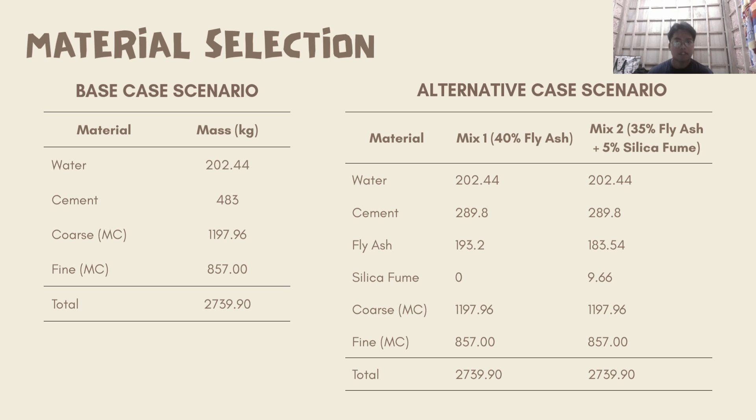The concrete mixtures for the base case scenario and alternative case scenario are based on ACI 211 mix design method. The goal strength of these mixtures is 43 megapascals. For the ACS, two mixtures are tested first, one with cementitious materials of 40% fly ash, and one with 38% fly ash and 2% silica fume.

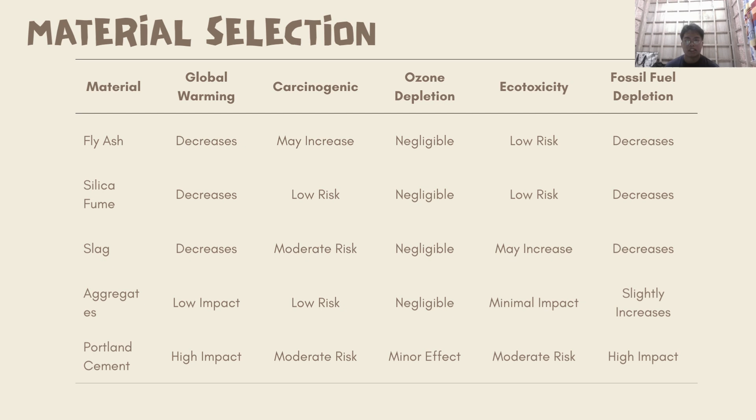The supplementary cementitious materials are selected based on their effect on the environment and on the properties of concrete. The three SCMs reduce the greenhouse gases emitted and fossil fuel consumed when applied to concrete. The aggregates generally cause low risk on the environmental factors. The Portland cement, however, has high impact on global warming and fossil fuel depletion, moderate risk on carcinogenic and ecotoxicity, and minor effect on ozone depletion.

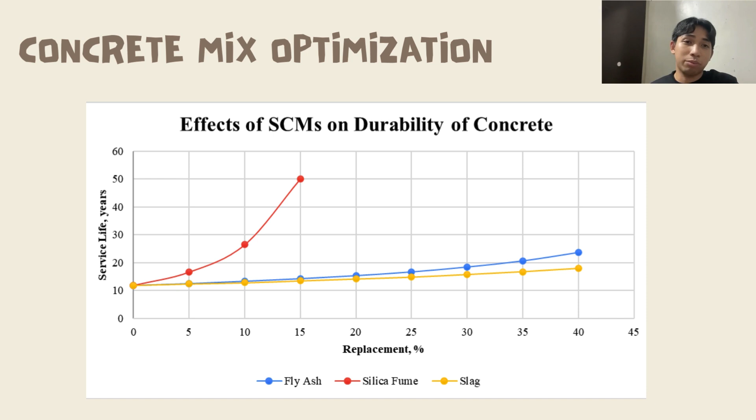The team wants to optimize a mix containing the SCMs shown while considering their effects on both durability and environmental impact. In terms of durability, it was found that silica fume produced the most durable concrete even at a low replacement percentage, followed by fly ash and then slag.

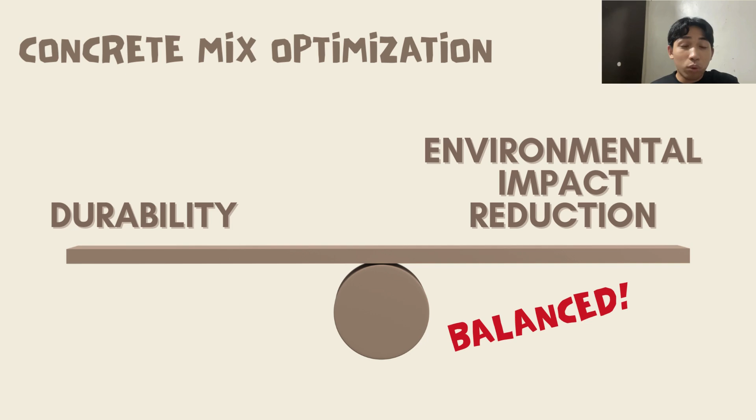In terms of environmental impact, fly ash produced the most eco-friendly concrete while silica fume yielded negative results. Again, we want a mix that balances both durability and environmental impact reduction. As a recap, fly ash was the most eco-friendly, while silica fume was the most harmful but produced the most durable concrete. Slag had the same trend as fly ash, but less in both parameters.

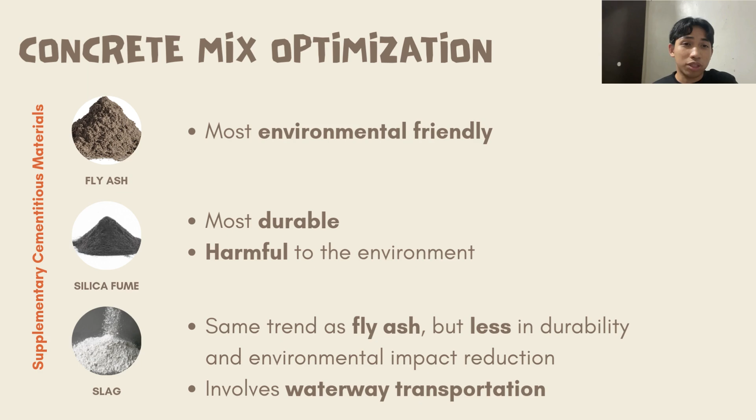Also, slag involves waterway transportation, which is impractical since our location mainly uses roads. Given those, the team chose fly ash and silica fume. The team decided to work around fly ash since it was the most friendly, but also added minimal silica fume to capitalize on its high durability.

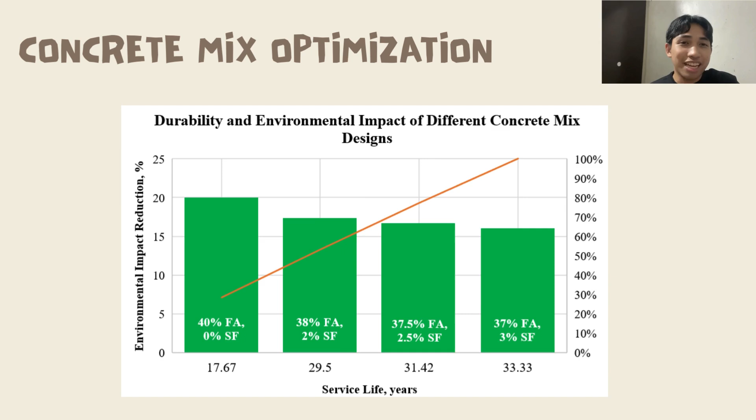The team identified 4 different mixes, and the plot shows the mix's durability and environmental impacts. All what's left is to determine which mix is the most balanced. We did that by normalizing the values, and upon doing so, we determined mix 2 with 38% fly ash and 2% silica fume as the most optimal design.

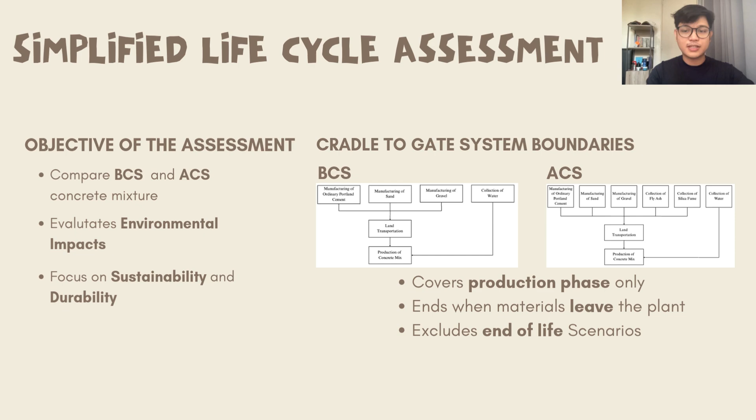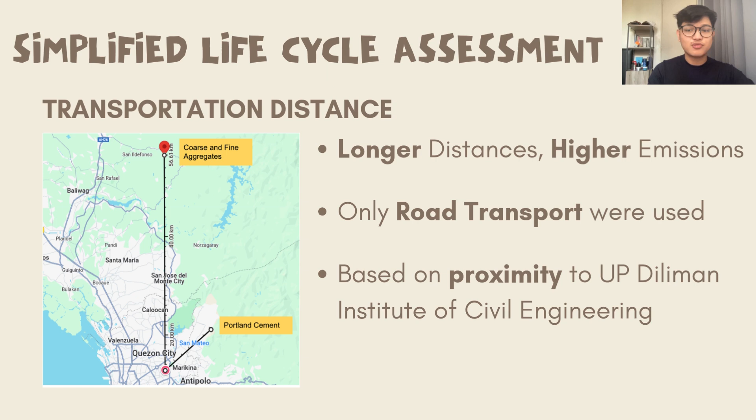While replacing cement with sustainable alternative, it increases transportation-related emissions. Transportation distances were a key factor, as longer distances contribute to higher emissions. To minimize this, raw materials were sourced from the closest facilities to the batching plant at the University of the Philippines, Diliman, using only road transport. This strategic sourcing helped reduce the environmental impact from transport, supporting the ACS overall sustainability.

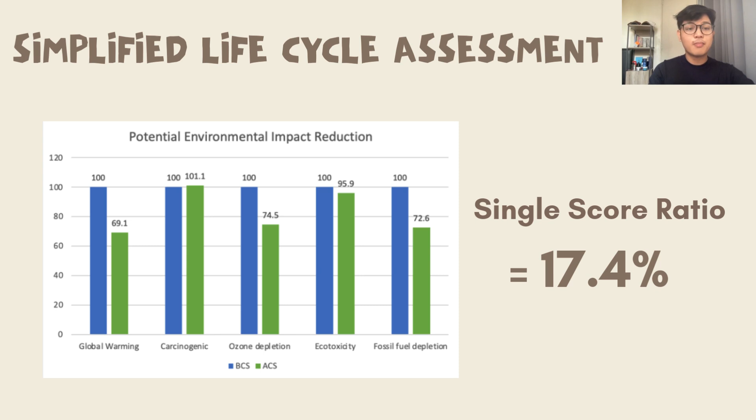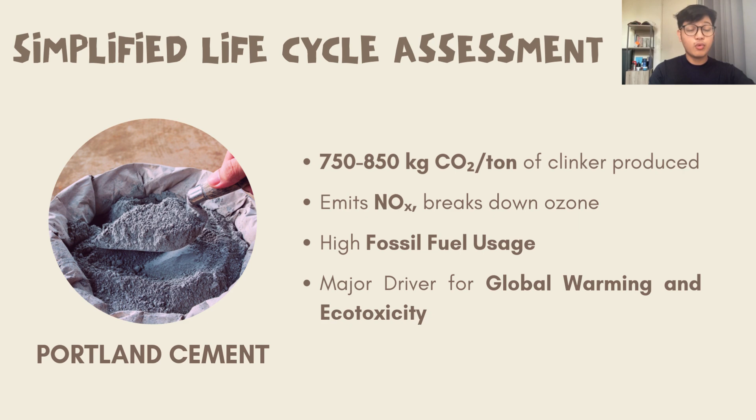In the Ecoconcrete calculator results, the ACS mix showed a single score ratio of 17.4% in environmental impact compared to the BCS. Portland cement was the largest contributor to environmental harm, releasing up to 850 kg of carbon dioxide per ton through calcination and high-temperature kilns. It also emits nitrogen oxides, which contribute to the ozone layer breakdown and requires significant fossil fuels. Aggregates added further strain through habitat destruction and erosion.

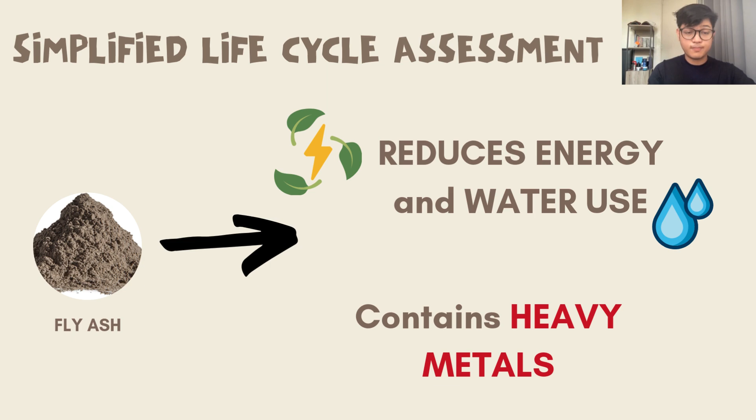While fly ash can increase carcinogenic risk due to heavy metals, it reduces energy and water use. On the other hand, silica fume lowers pollution and conserves resources. Together, they significantly improve sustainability while maintaining performance. Thus, the team chose a final mix of 38% fly ash and 2% silica fume.

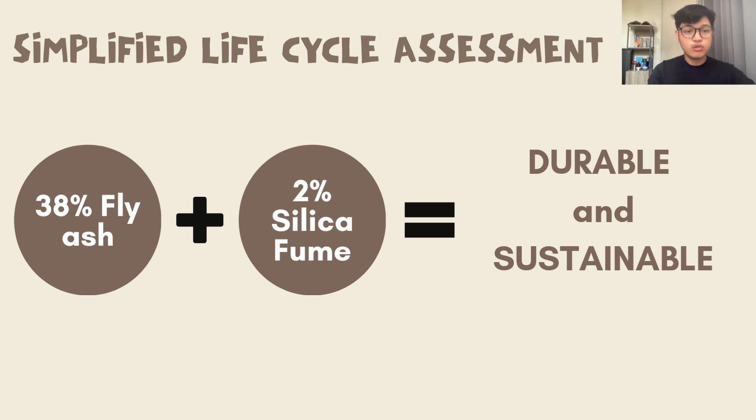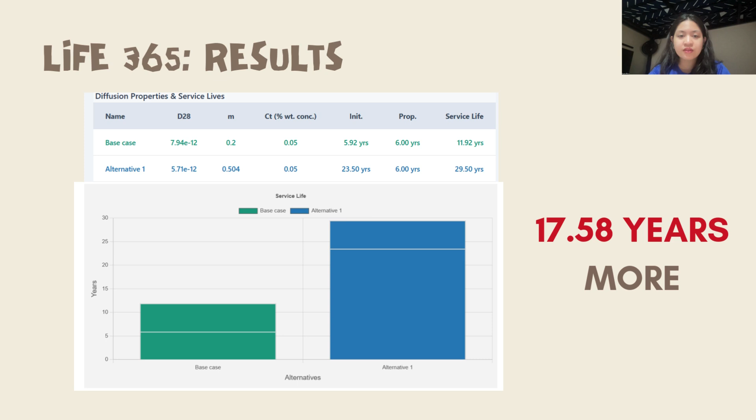This slide presents the total service life prediction for both the base and alternative mix designs using a Life 365 model. For the base case, it predicted service life up to 11.92 years. On the other hand, alternative case significantly extends the service life to 29.50 years.

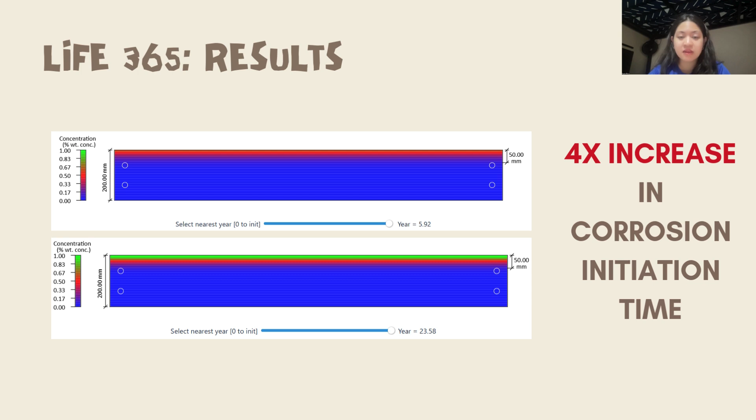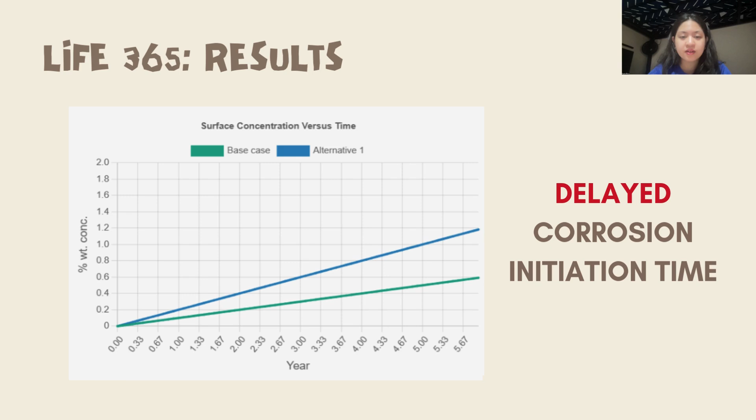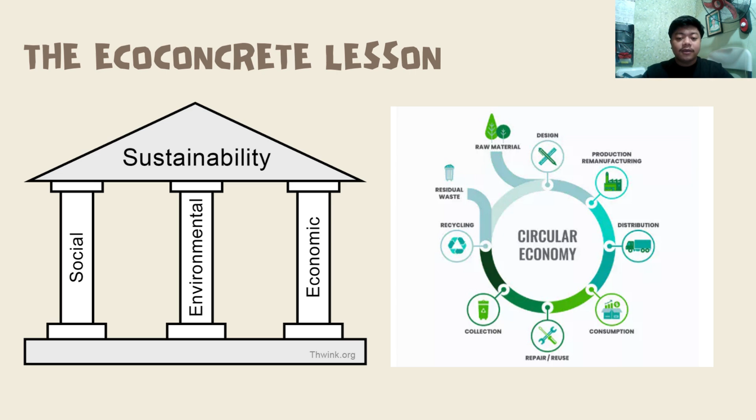In creating a circular economy, the use of byproducts contributes to promoting such, and through engineering it is possible to not just reduce the environmental impact with respect to ACS but also a balanced consideration on other aspects such as durability. And balancing its impact on all considerations must be done because this is what Ecoconcrete means, and this is what the world needs today: engineered balance.